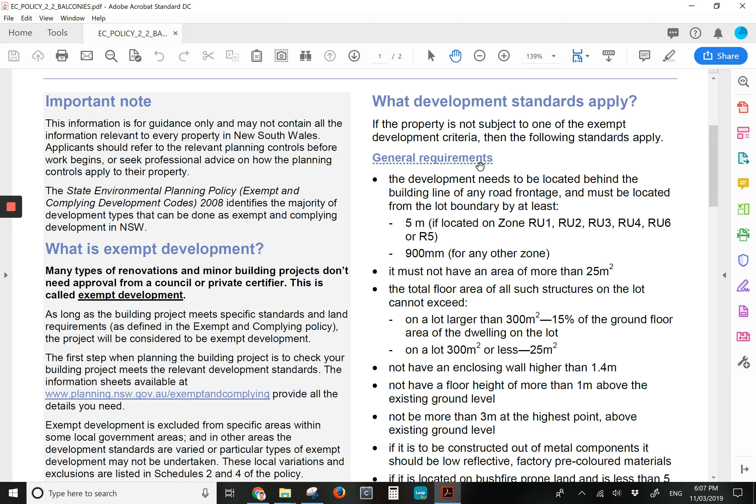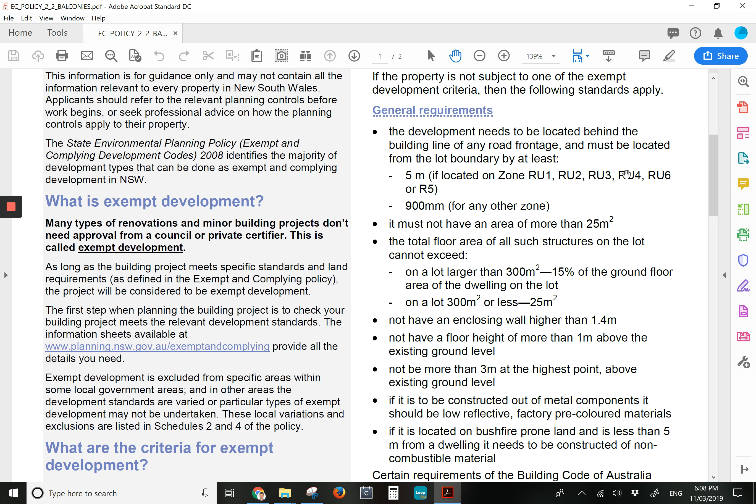So we're going to start over on the right-hand side underneath the general requirements. The first point to really acknowledge is you've got to make sure that you're 900 millimetres off the boundary line, and you've got to be behind the building line of your road frontage. The RU zones here are really not applicable for us because that's generally rural applications, but the 900 millimetres should cover most people throughout the Sydney Basin.

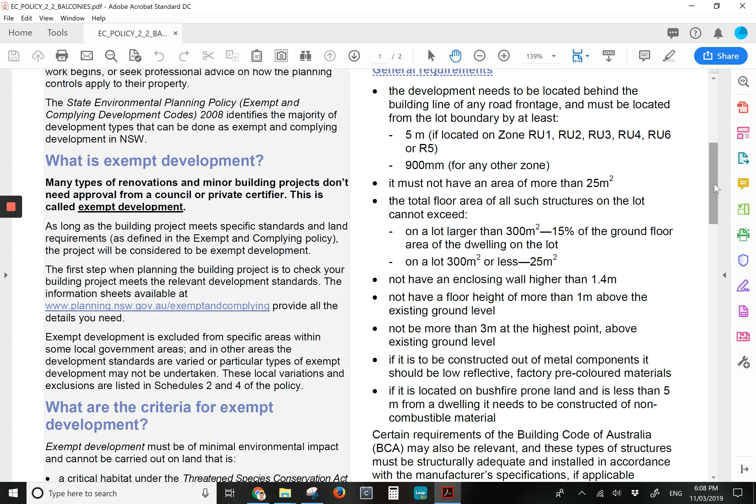Most people stop here in terms of it must not have an area of more than 25 square metres and don't go any further, but they don't take into consideration these other points, and I think there's roughly about a dozen to consider. The next one here, on a lot larger than 300 square metres, which would be most of our clients, refers to 15% of the ground floor area of the dwelling on the lot. So basically if you've already got a balcony, deck or terrace area, pergola, etc., the sum of those areas can't be more than 15% of the ground floor, 15% of your ground floor, if that makes sense. So generally speaking, that should be covered and you can fall back onto that 25 square metres.

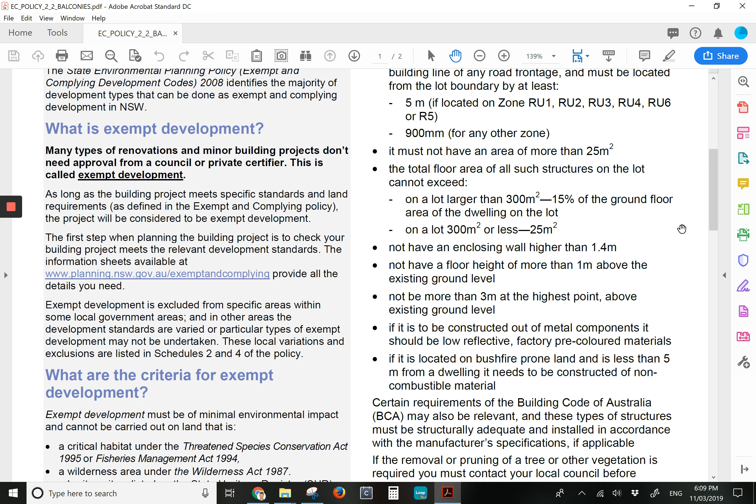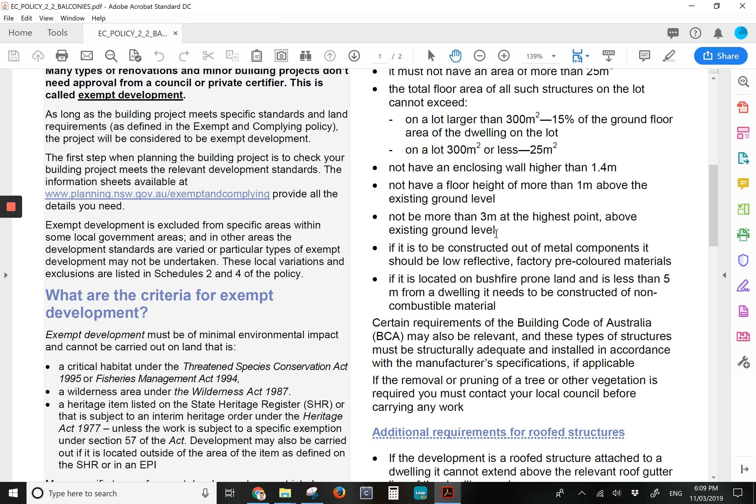Walls, not more than 1.4 metres in height. And this next one here, not have a floor height of more than 1 metre above the natural existing ground level, really applies to your decks or your external floors. I get this a lot where people just presume they can throw up any type or size of deck, but really they've got to come back here as well. Now here, not be more than 3 metres at the highest point above existing ground level. That can also be taken into consideration if you're going to do a gable or something along those lines.

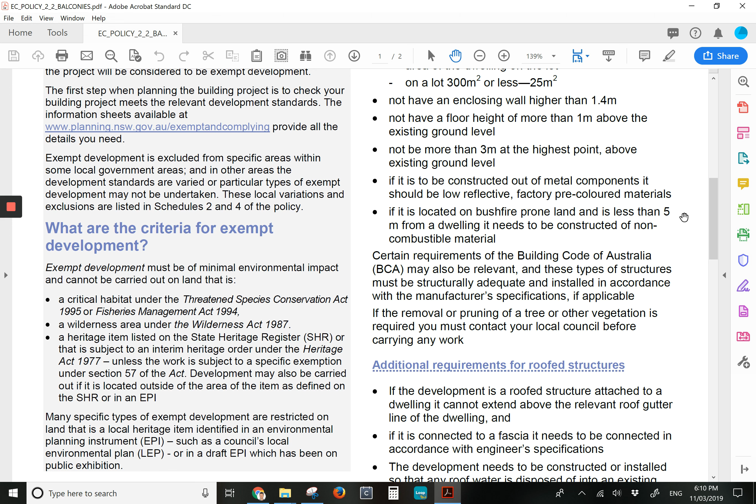If it is constructed of metal components, it should be of low reflective factory pre-coloured materials, which can be pretty standard to tick that box. If it is located on bushfire prone land and is less than 5 metres from a dwelling, it needs to be constructed of non-combustible material. So the key point there is less than 5 metres from a dwelling. Most constructions would be connected back to the house, so non-combustible material can come back to your Colorbond or your steel applications. There's a few more to go.

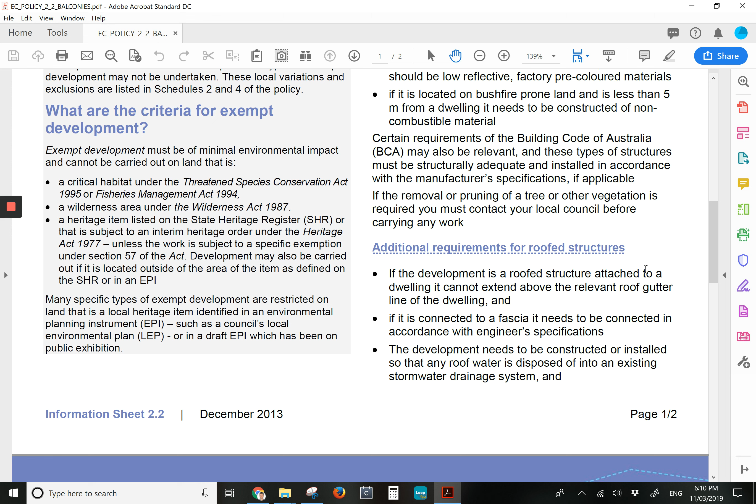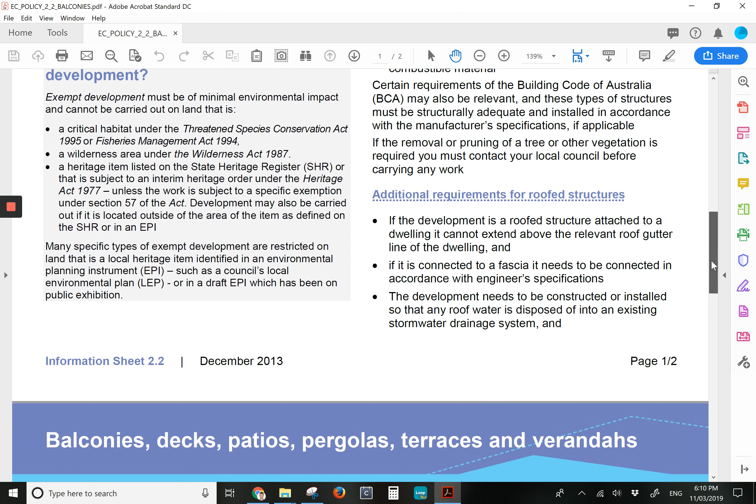Down the bottom here, if the development is a roofed structure, so if you've got roofing sheets, whether it's Colorbond, insulated, whatnot on top, it cannot extend above the relevant roof gutter line of the dwelling. So that really rules out flyovers and sitting above the existing roof lines, which are becoming quite popular at the moment. If it is connected to the fascia, it needs to be connected in accordance with engineer specifications, which is a standard one to tick.

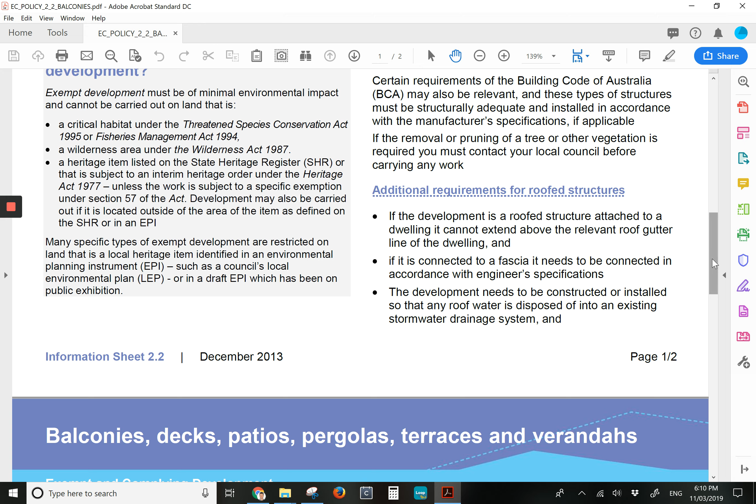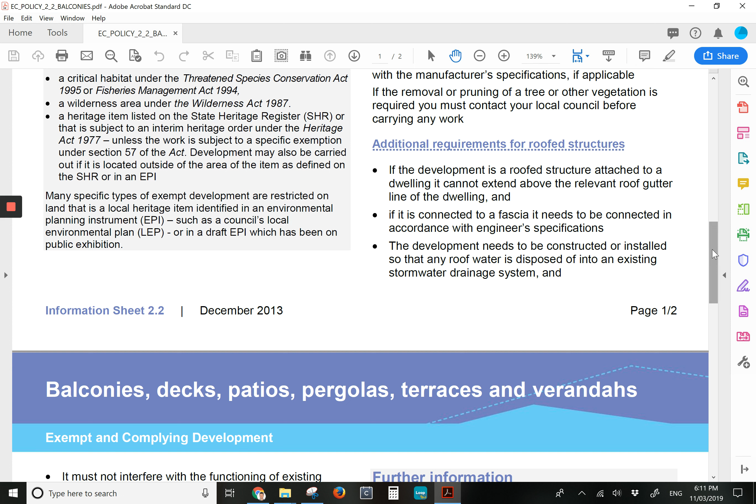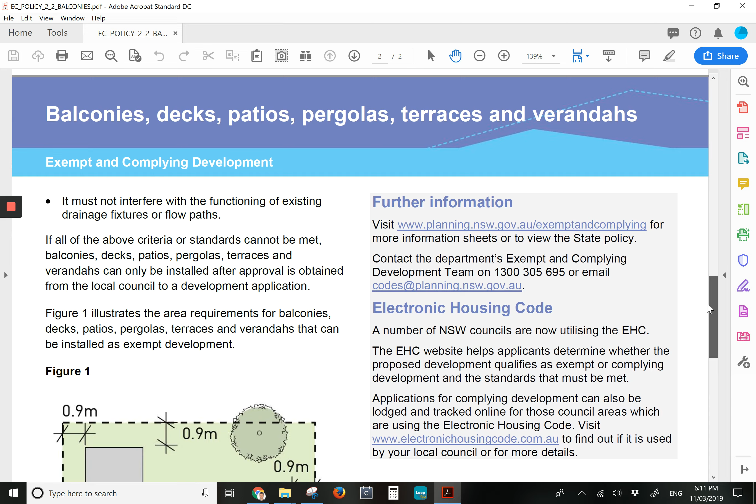The development needs to be constructed or installed so that any roof water is disposed of into an existing stormwater drainage system. In other words, you can't have the stormwater running off into your garden bed and then into your neighbour's driveway and disturbing people. We'll go over the page. Must not interfere with functioning of existing drainage fixtures or flow paths, which is pretty easy to tick as well. So if all of the above criteria cannot be met for balconies, decks, patios, etc., they can only be installed after approval is obtained from the local council to a development application.

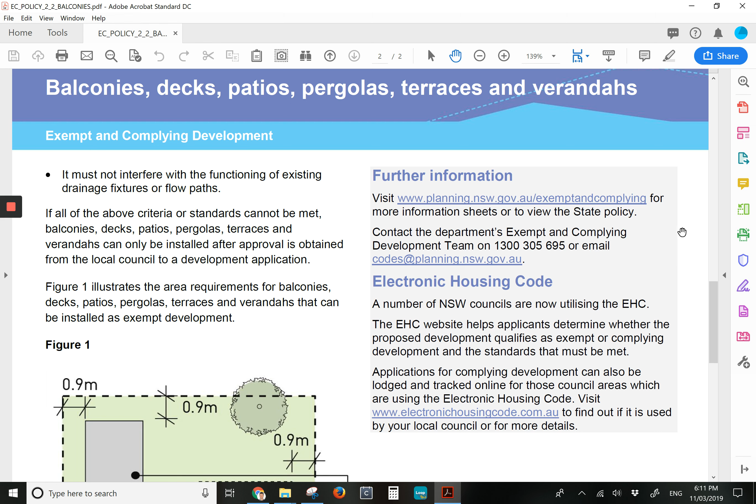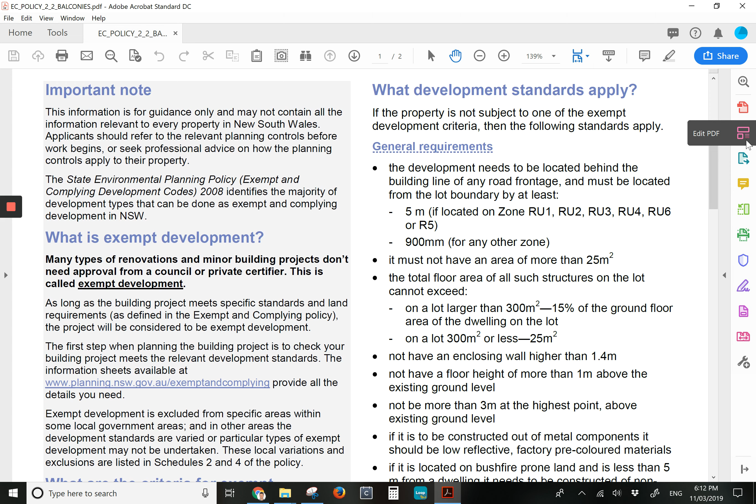So from here, if we're not meeting these requirements, I would refer back to have a look at complying development as the next step, which is basically an approval process you can obtain either through council or through a local principal certifying authority, which basically speeds up the process. Failing that, it means we're going to council for a DA. So I hope that gives you some understanding of the exempt development checklist, so you can really understand whether your patio, pergola, or deck requires an approval for your home.